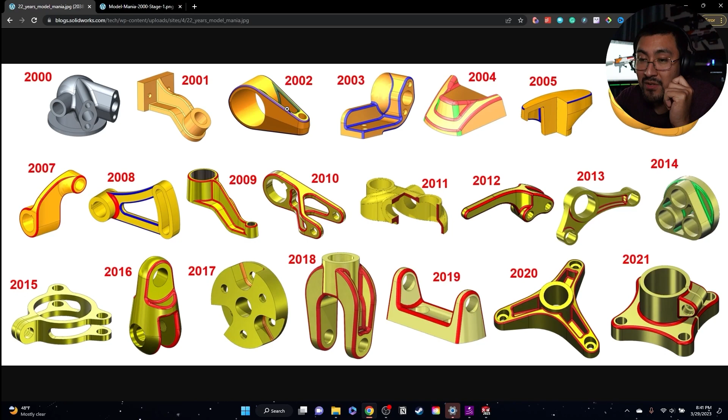Let's do this. Let's look at this part here. This is one I've been looking forward to, funny enough, because it has draft in it. This draft always throws me for a loop, especially since my specialty is actually plastic design. They have draft in both directions, and there's this cut in it. I'm wondering if this cut is going to be a shell or a rib feature. I don't know, so let's check it out.

Scroll down here, and it's two phases. So the first phase of the drawing - oh, this was in color. Let's look at this part. There's actually draft in it too, which immediately gives me a couple ideas. And it does look like it's symmetrical up and down, which makes it much easier.

What's this? Section BB. I'm looking for that BB symbol here. There's that A, BB. Oh, so basically it's just this wall, showing you the draft, which is 7 degrees. Let me see here, 7mm wall thickness, 15 degrees. More draft here, 7. So the general draft is going to be about 7 degrees, which is okay - it's a good amount, a substantial amount. It will definitely come out of the tool.

And then the center here, there's no radius. So okay, I'm going to do this color coding as well - I actually really like this color coding. 3mm fillets for the green. Is the purple different? Edges of part and inside of the pocket is shown. So they don't have it as two different radiuses - that would have been cool. Fillets removed for clarity - that's pretty cool.

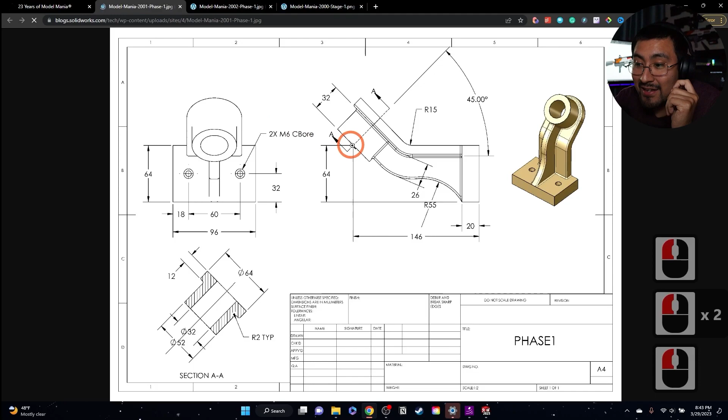Okay, so unlike the other parts, this one actually looked pretty good, but for the... it's just like, oh wow. And now the 2002 version comes out, it looks really different. Oh actually, let me first check, because I always kind of forget.

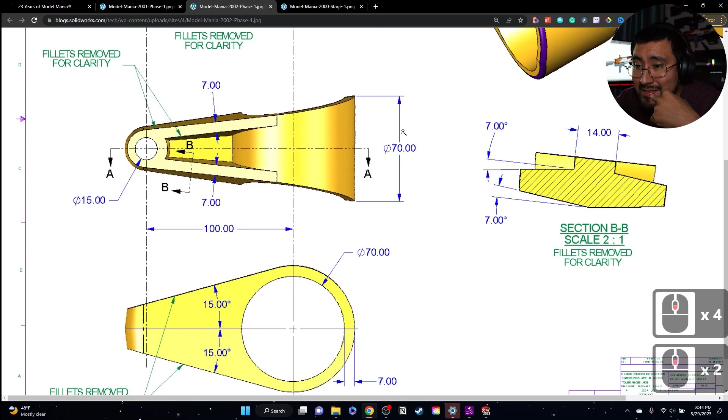Go down here, and this part is going to be in inches. Oh, so there's actually a pretty big part - that's insane. Interesting, I don't know what this diameter means here. I mean, it's both sides, so I'm going to use a full. I'm actually not going to focus on any one view - I'm going to focus on all 3 of them at once.

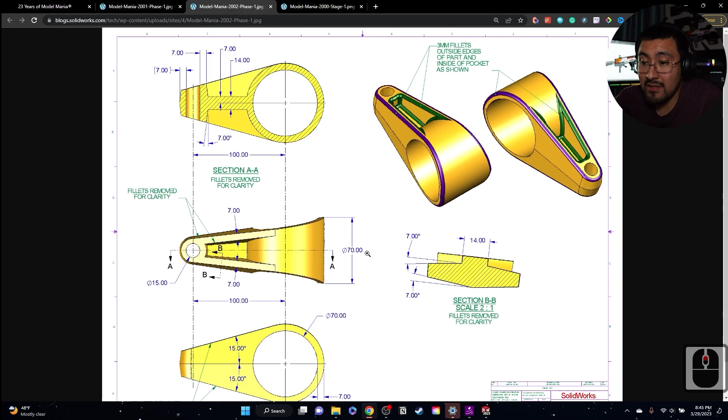So the way I'm going to start this is I'm probably going to make this shape on the right plane, make this my center, and just extrude this 70 inches - apparently 70 inches. So let's start that in SolidWorks.

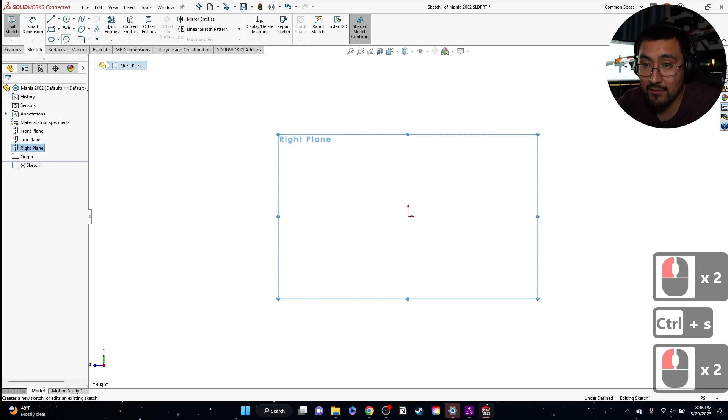So let's go to File, New. Let's press OK. Let's save this - I'm going to name this one Mania 2002. And remember, all these files are going to be available for you guys to download. Anything else - make sure this is in inches. Perfect, save that. Make sure to right click on the right plane, and then let's start this.

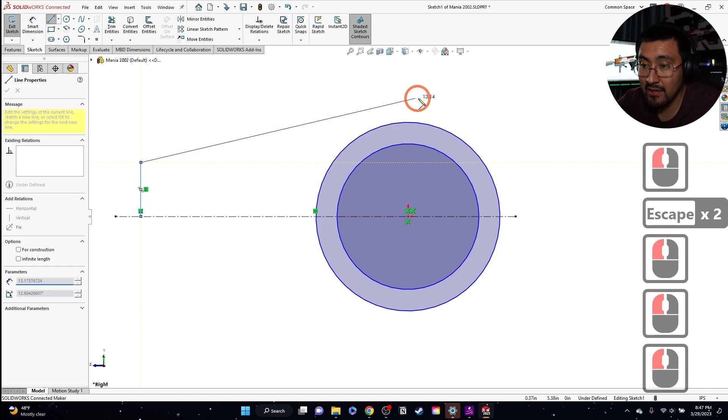So I'm going to start here. I'm going to do the basic shape, and then I'll give it dimensions later on. Actually, let's do this - I'm actually going to build this in half. So I'm going to go like this, and make a straight tower. The reason I'm making it straight, and you guys will see later on, is that I'll be able to draft all the walls at once, and I won't have to worry about that so much.

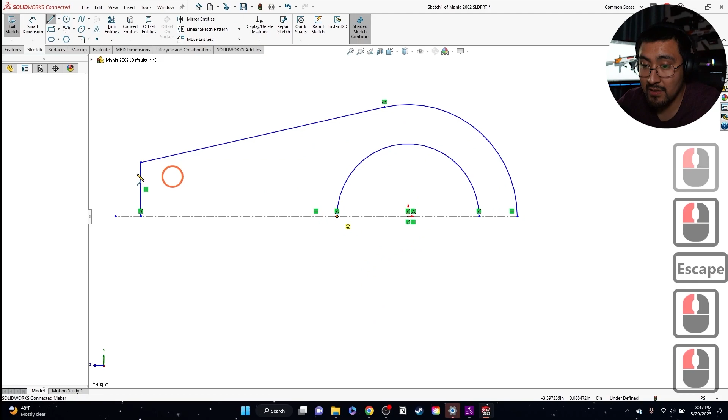Oops, let me make sure this is actually touching here. Trim, trim, trim. Make sure here to here is connected, and here to here is connected.

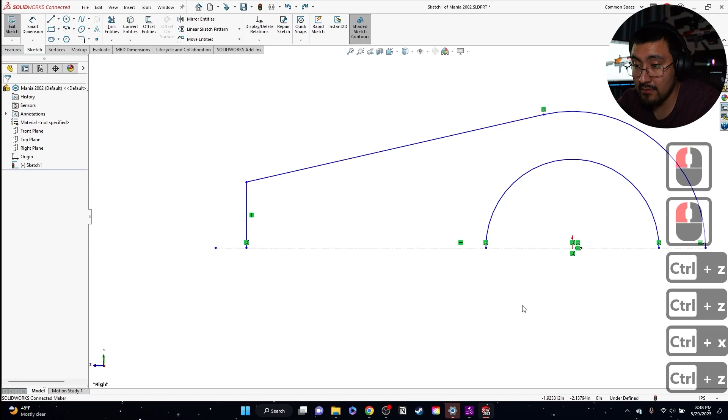And let's check out the dimensions. Oh, actually there's going to be like a center line here giving the diameter of the hole that's cut in here, so I'm going to use that as a reference. I'm going to Control Z it, and I'm going to keep it like that for now in case they change that on us, which I doubt, but you know, better safe than sorry.

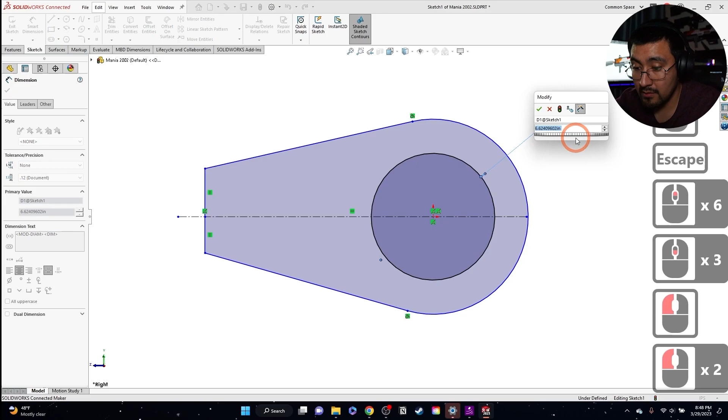So 70 here, and from here to here it's gonna be 7 inches, and there's gonna be a center line here. I'm just going to use that as a reference for now. And this edge to this edge is going to be 100.

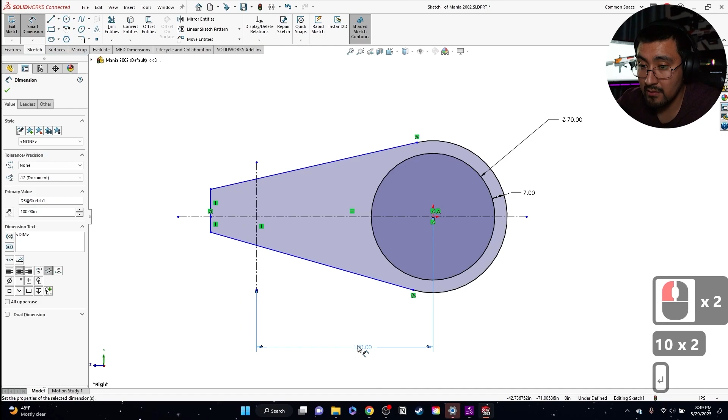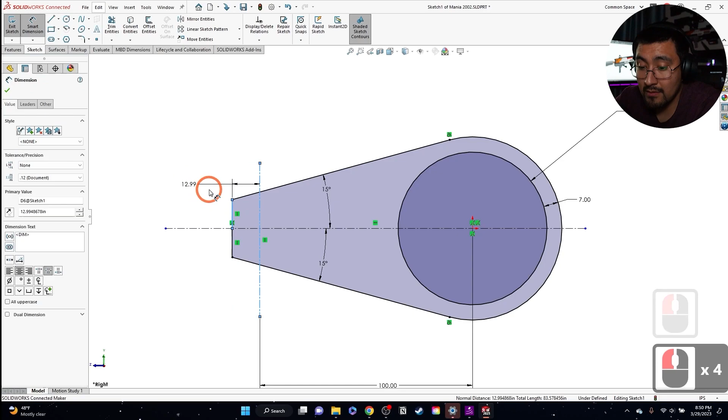And then this to here is 15. This to here is 15. And now, so here to here is going to be 12.99. That's a reference dimension, by the way, so we're taking quite a risk there.

And we're going to extrude that mid-plane 70 inches. Boom. Save that.

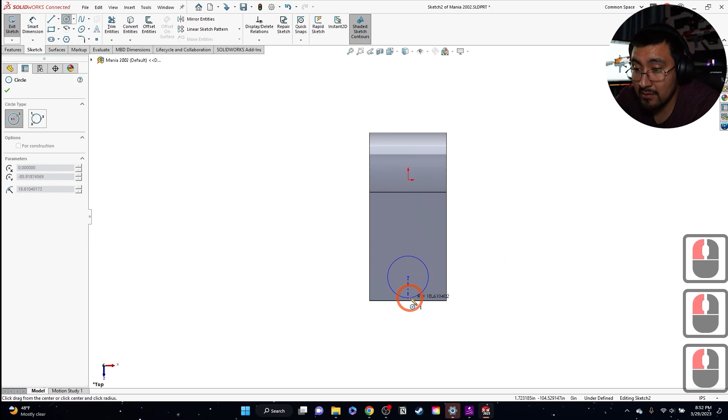Now we're going to go top plane. So I'm going to go here. And then in our sketch, we actually made that reference. So here we're going to actually do a pierce. There we go. Make this tangent to this face. There we go. And now I can actually hide that sketch for now.

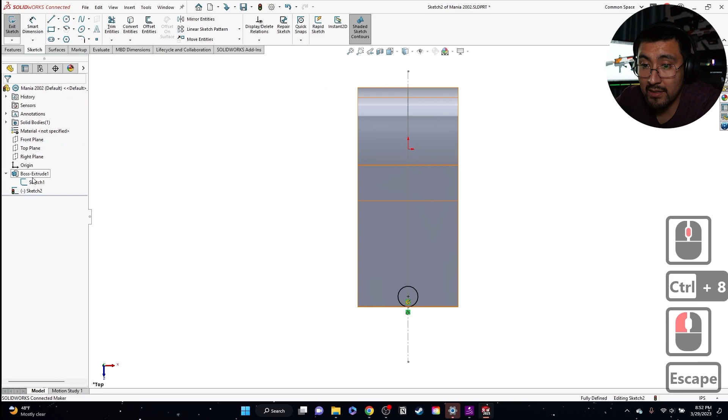Here, to there, to here. Not that. Something tells me I'm doing something wrong. We'll soon find out if that's it.

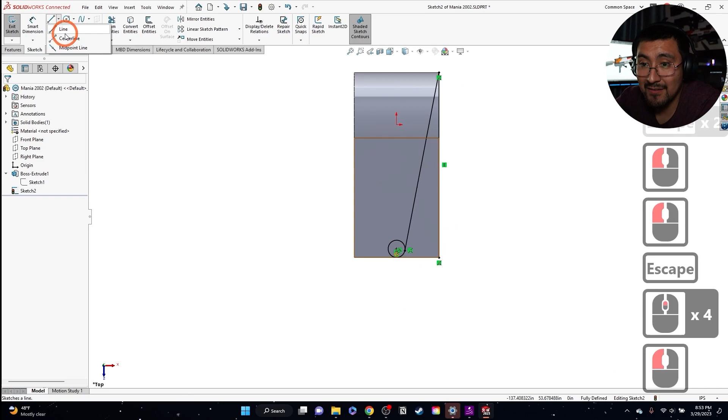Mirror this. I love mirror, by the way. It's my favorite thing to do. Basically means you gotta have less work to do.

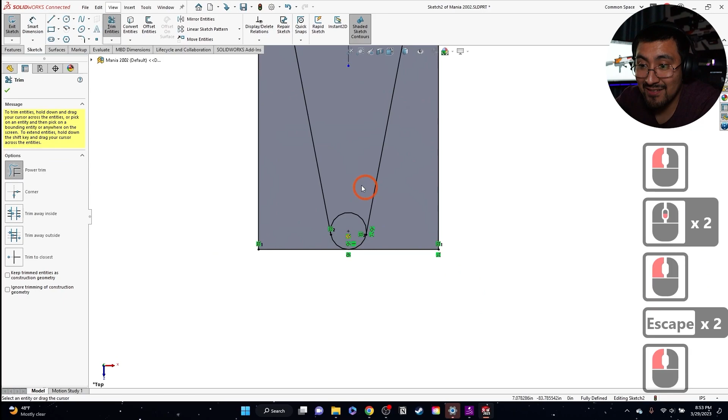And then we're gonna get both regions. We're gonna do through all both. Press OK. Now we got that.

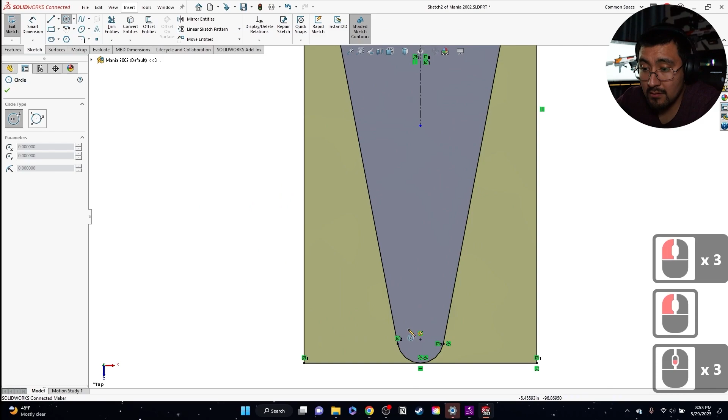Sure. Same time I could do that cut as well. What's the dimension for that cut?

15. Something looks off here. Actually, wait, this is the wall thickness from 15. I actually have that wrong. So this is actually 15 and the 7.

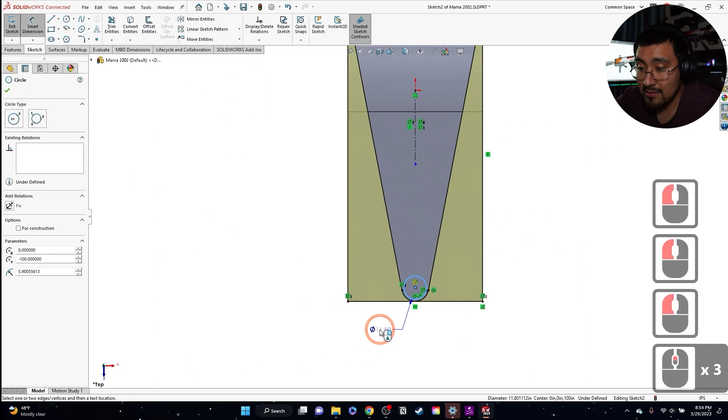So okay, there's one mistake. So let me go back. So here it's not 7.

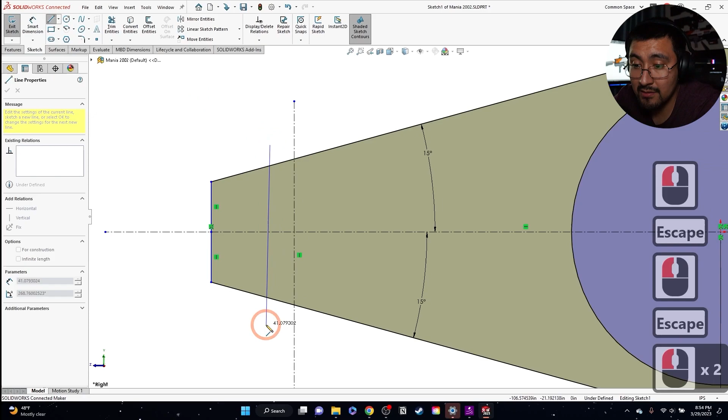So we're actually gonna make two references. We'll make this line here. And it probably would have been better to do another sketch, but since I'm at this point, do 15 there. The reason why I made it a solid line is because you can't do a dimension like this on a construction line, and now I could change it to a construction line.

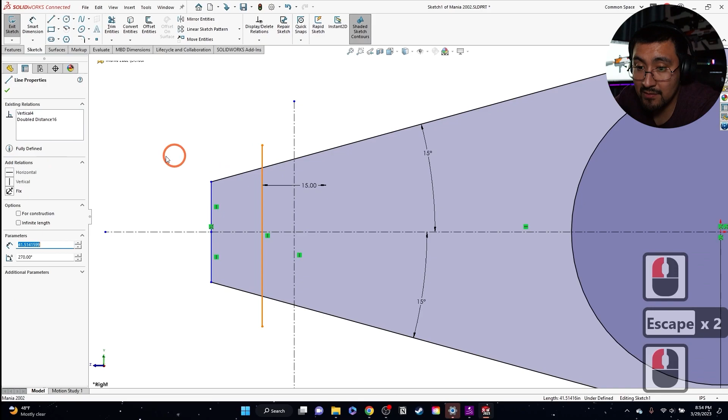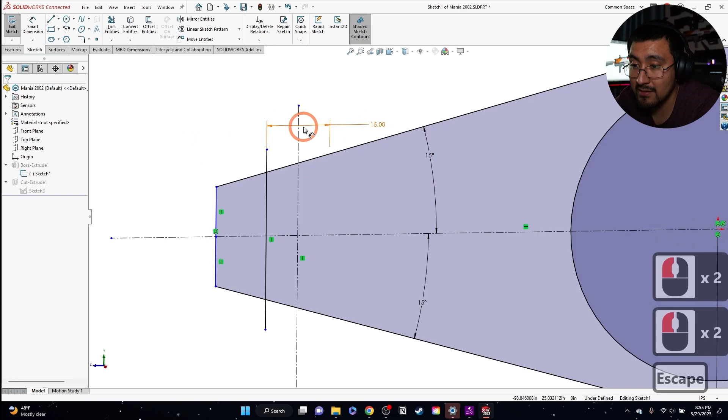There'll be no issue. I changed it back, so I want to keep it as a solid line. Yeah, so I could keep that 15 in case we want to change it in future. So I'm gonna do the 15. I'm gonna keep it as a solid line. I thought it would keep it as a regular line.

Oops, almost forgot one more dimension, which is gonna be the 7 from the edge. And then let's press OK. Exit and let the sketch rebuild. I know it's gonna break.

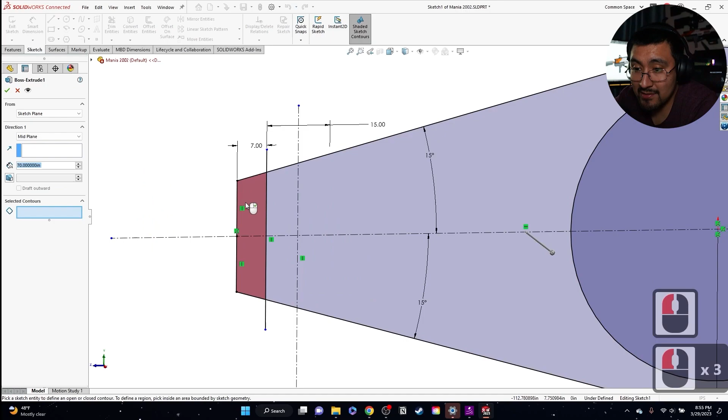And we're gonna pick the regions instead. Region. And now we'll go back to this. And this is gonna be really messed up.

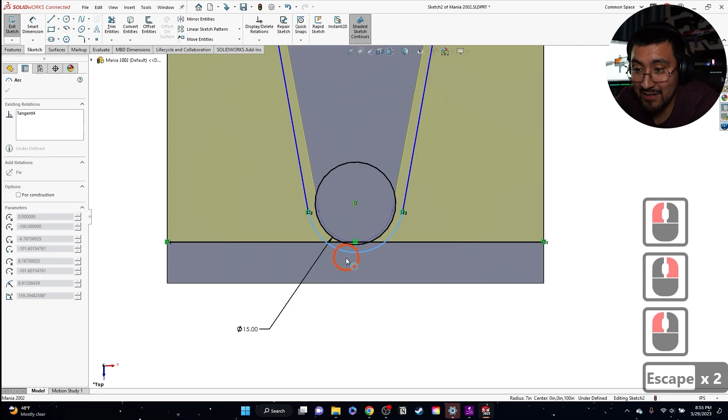So this tangent right here, which is not really tangent anymore, it's gonna be tangent all the way to the outside. Here we go, tangent. And then...

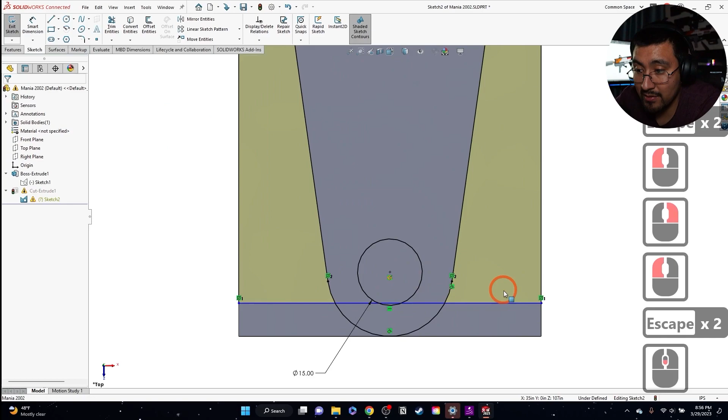Things wrong here with this line. Why is this line up here? This coincidence is broken. Let me fix that here.

And let me redo all of the regions. There we go.

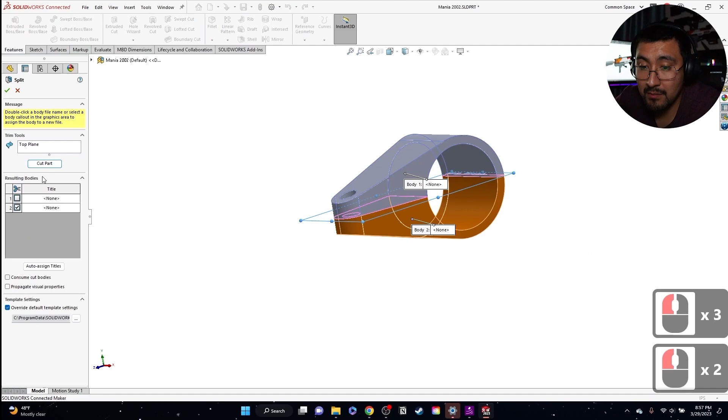Okay, I'm gonna do one thing here. We'll go insert, features, split, cut part. I'm gonna cut the part and I'm not gonna consume it. It's gonna leave these two parts. I'm gonna hide one for now.

And then what I'm gonna do is go back to the sketch, which we're now gonna classify as master sketch. And I'm actually gonna do another center line. This center line here is gonna indicate, and I wish I did this on the opposite side as well, which I could probably do with this mirror about. There we go.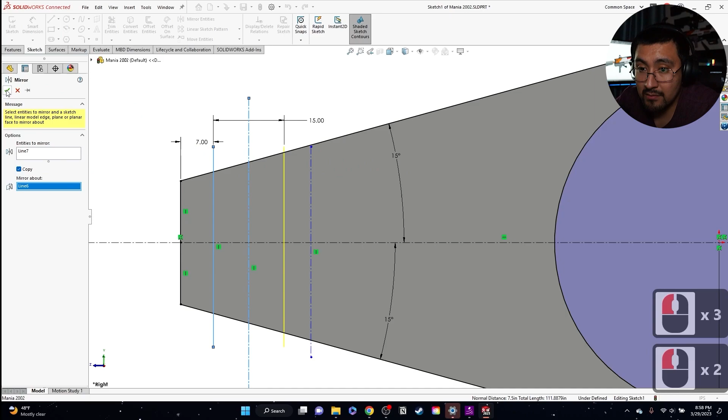I'm gonna indicate with this. I'm gonna give this a dimension of 7 now, which is gonna make it that wall. I'll make sure it contacts this point here. And it's gonna break it again.

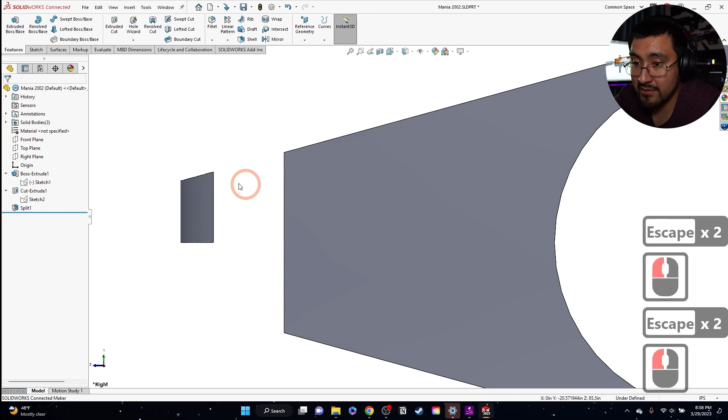So we're gonna include this region. And this extrude cut, I don't know why I gave it the 15. I'm gonna remove that and then just make it pierce the line in that sketch, so that sketch could be our master sketch for almost everything.

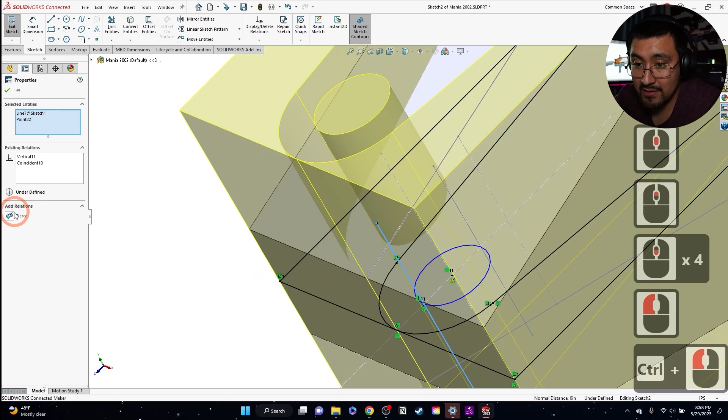So we're gonna get this, we're gonna touch that, we're gonna pierce it. And now it gives it a relation. So what I'm actually gonna do, I'm not sure if this is the right way, honestly.

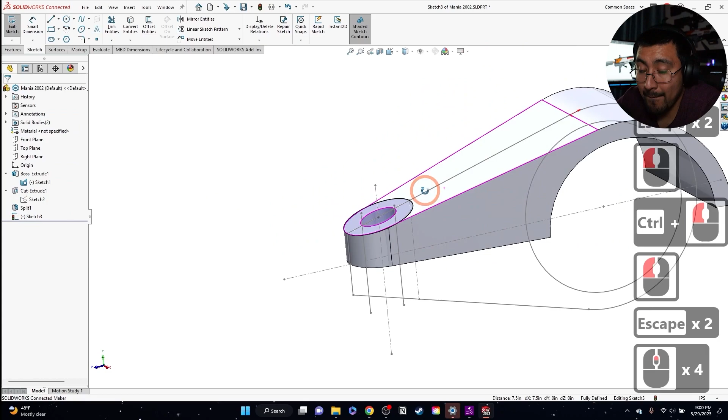I'm gonna get there. Make sure this is concentric. I get this line here. Get this line here. I'm gonna offset 7.

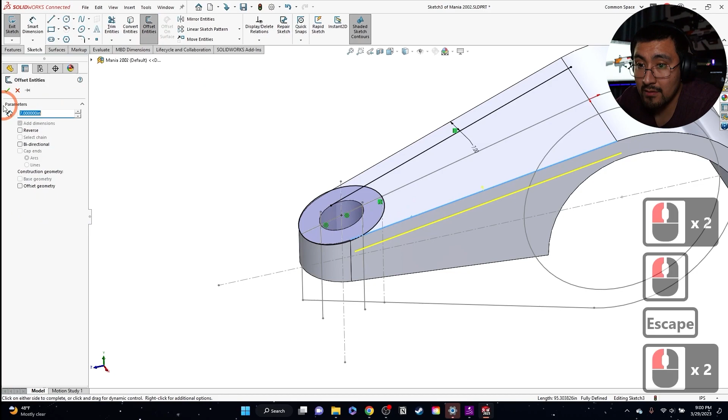Oops, I guess I can only do one at a time. Offset 7. Offset 7. Actually, before I complete this, I'm gonna scroll back on this.

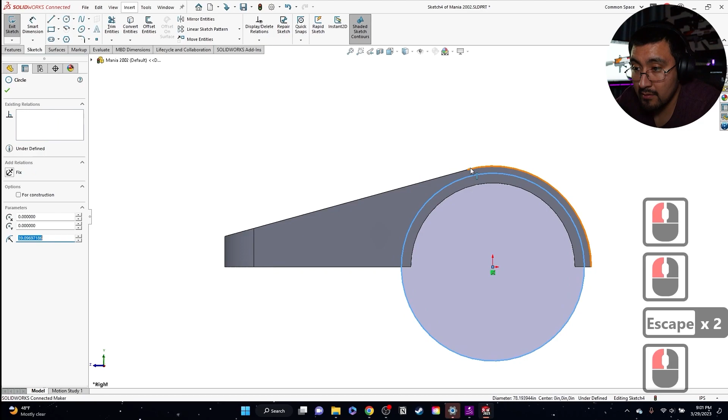I'm gonna hide this. And then what I'm gonna do is I'm gonna actually make that equal.

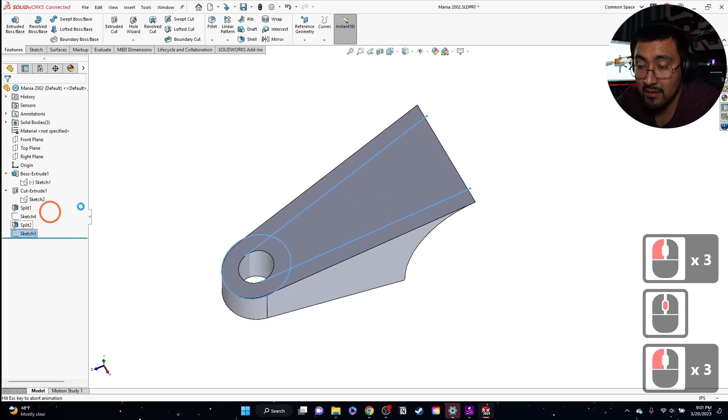Insert, features, split, cut. I'm gonna cut that out. Well, I'm not gonna cut it out. I'm just gonna split apart, hide that, go back to my sketch, go to this sketch, convert entities, and then trim. Okay, trim.

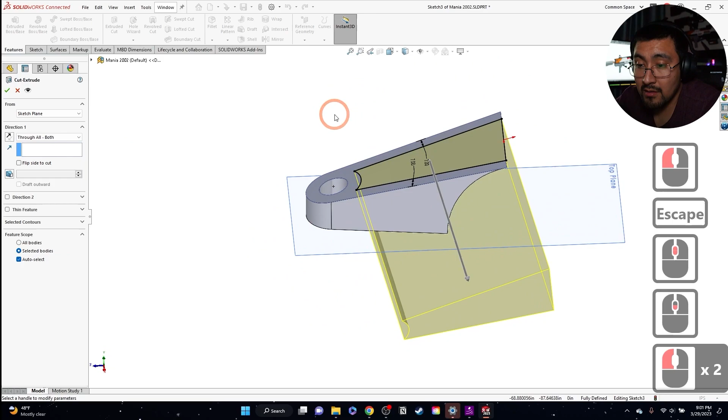Okay, cool. What I'm going to do is make this visible, which is the top plane. Extrude cut, I'm going to pick a direction, this direction. I'm going to go offset from surface, offset from 7, and press OK.

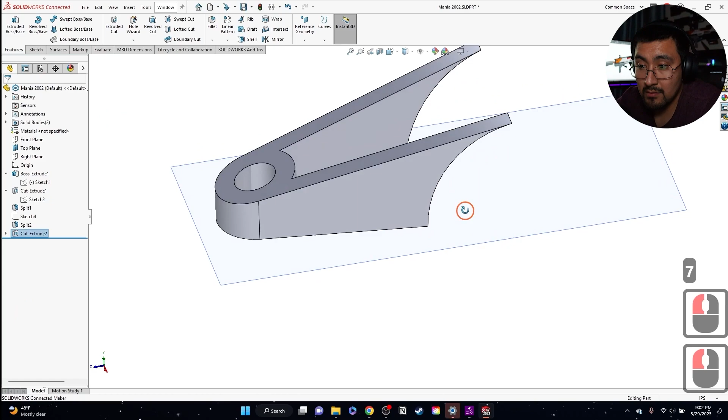Oops, forgot one thing, our 7-degree draft. I'm going to do the honest thing and consider the opposite side a completely different side. So I'm going to get that sketch I use, and split this apart. Split.

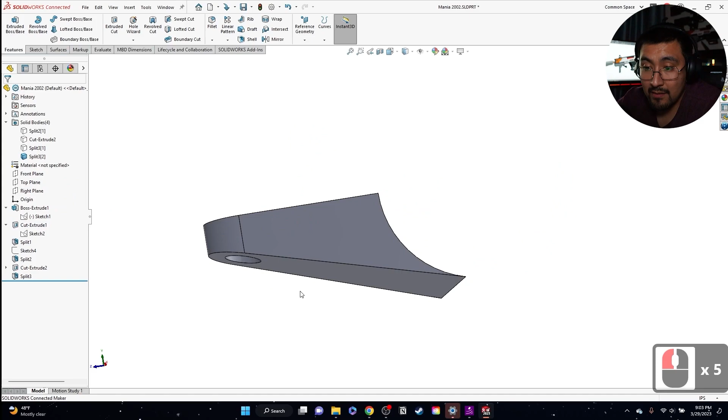Hide that, hide that. Go to the same sketch. Make my master sketch visible again. Make sure this is concentric. And then touch that. There we go.

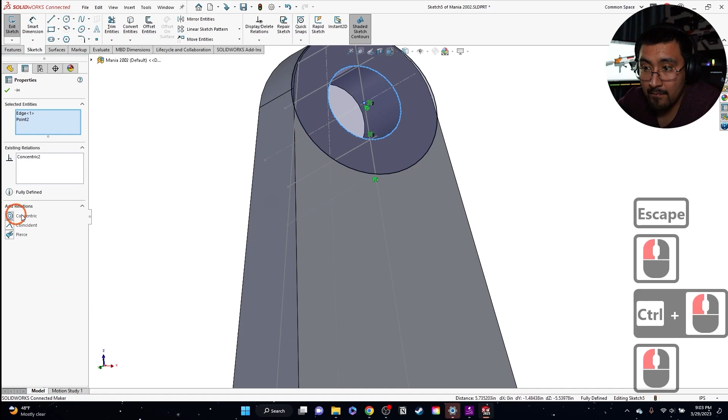Make this concentric, and then do the same exact thing. Offset 7. Offset 7, reverse this one. Get this line, convert entities.

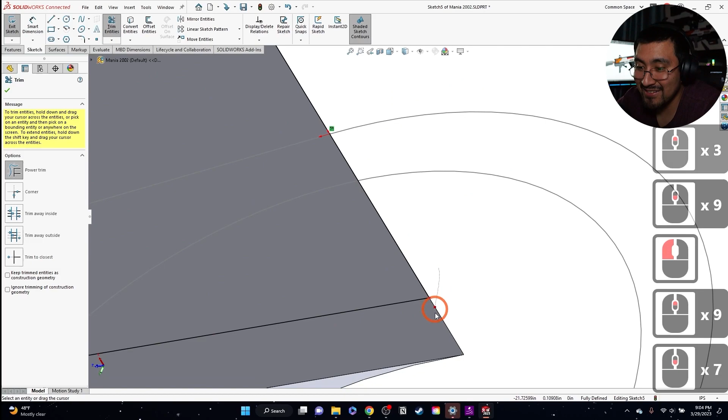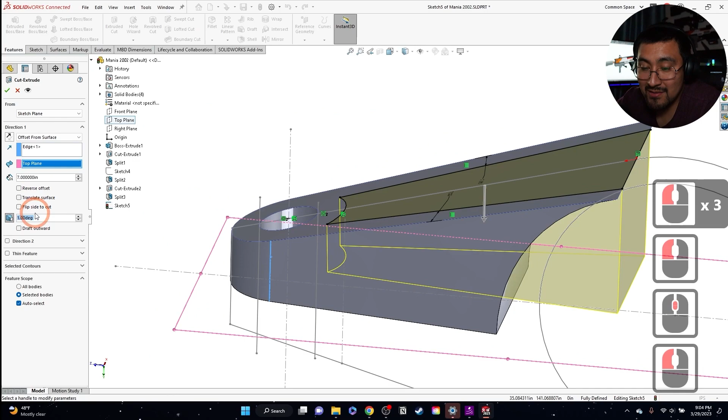Let me just pick the line. Let me pick the surface, which would be the top plane again. The draft, 7 degrees. Then let's hide this. There we go. Save.

Show that, show that, show that. Oh, let's combine all the bodies first. Combine. Oh, not all the bodies, just the top and bottom. This one, this one. Okay.

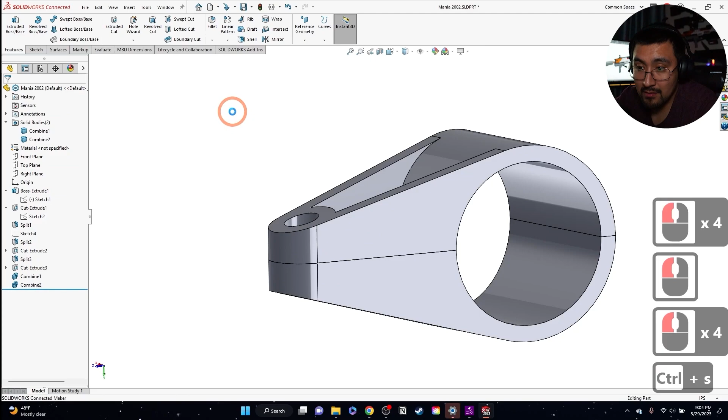What I'm going to do here is another draft. From here, 7 degrees. Right click, select tangency. Make sure this is pointing up. And then apply.

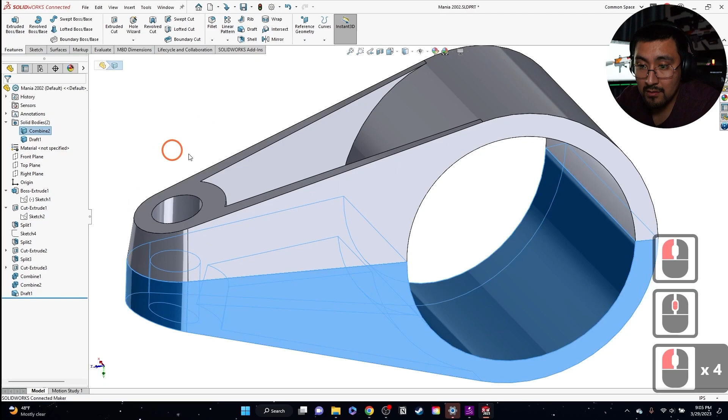Do the same thing to the bottom face. Draft, select the faces, select tangency. Make sure it's in the right direction. This is the direction to pull. And then draft.

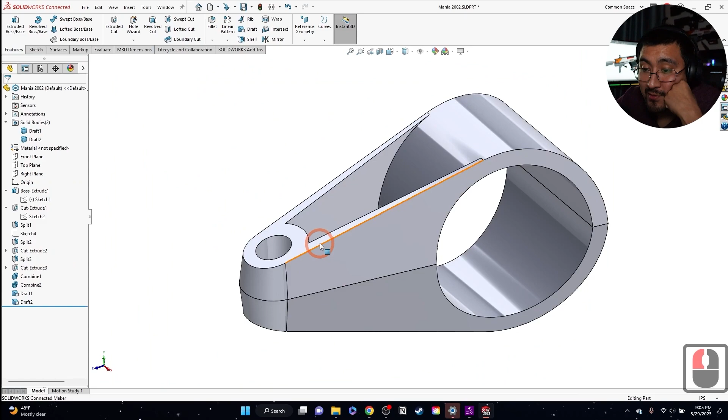And I think I made a mistake though. So this draft here that I just did should have been at a different level. So okay then, what I'm going to do here is do something that might break the tree. I'm going to pull this up. So first I'm going to see how clear it is.

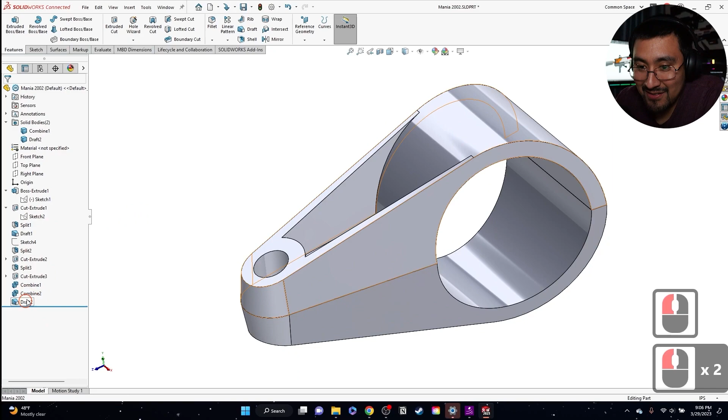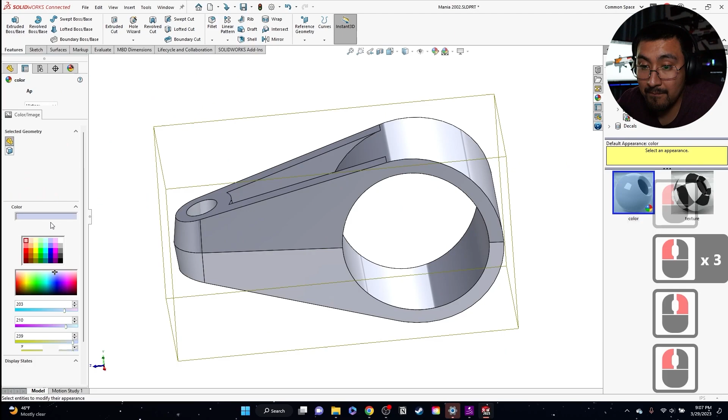So let's add a color to this, make it all pretty. Edit, it's that yellow color. There we go. And then the radiuses are 3mm fillets. That's funny, that's 3mm, and then it's 3 inches here.

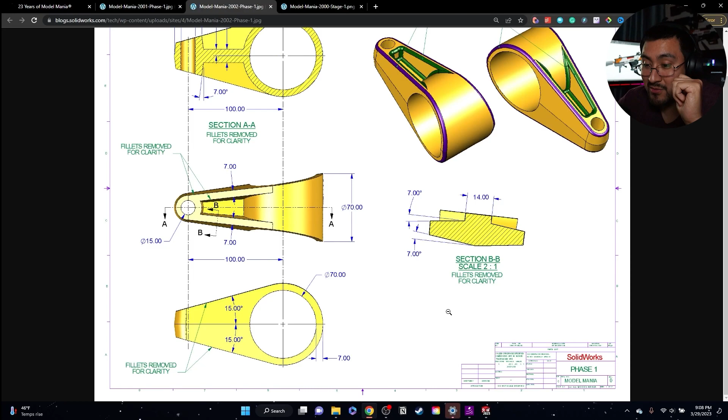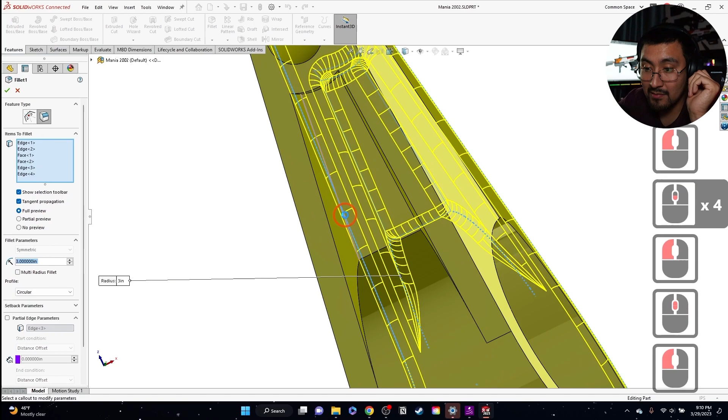So I'm just going to do the first one in here, which is going to be these radiuses in here. I'm going to separate these. I'm going to do the same thing on the opposite side. Oops, I think I clicked something wrong. Yes I did, I want faces.

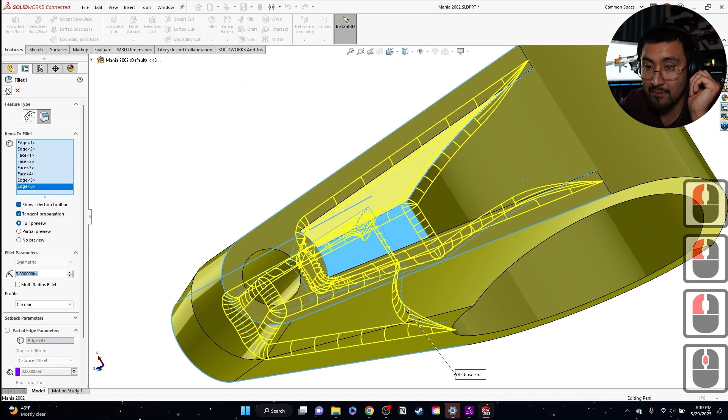This face, and just these 2 inner edges. Oops, not yet, not yet. Okay, press OK. Press OK.

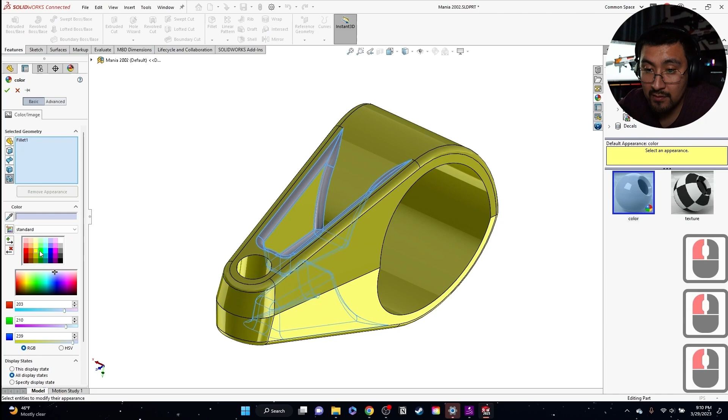And then the inside color was green. The outside was purple, the inside was very cool. So change this fillet, the green. Change the other fillet to purple. Cool, and there it is.

It's in inches, I feel bad honestly. I'll probably remodel this up in millimeters as well. Dimensions are in inches, yeah, dimensions are in inches.

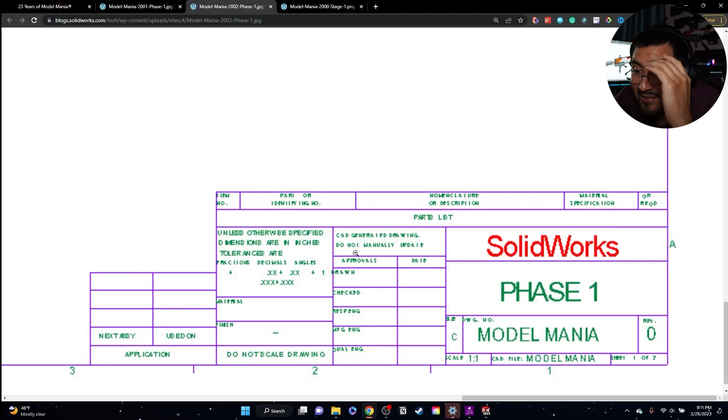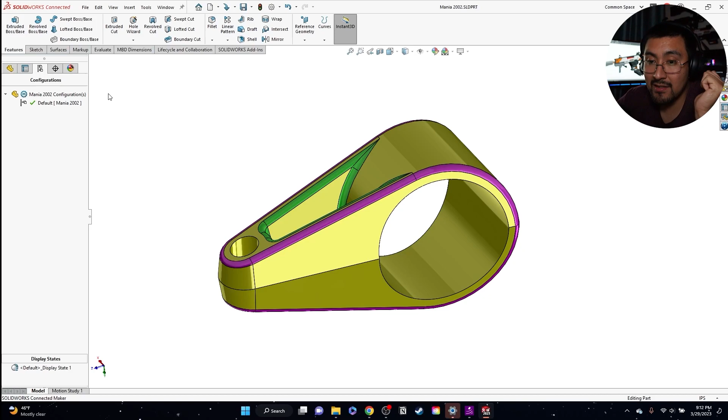It says it there. They actually do a couple configurations, and they do numbers, so they have the default B, C, and D. So this is a good thing because I get to show you guys how to do an Excel driven configurations list. You need Excel installed on your computer to be able to do this. If you don't have it, you're going to have to build every one of these configurations out, and I don't think Excel is hard to get nowadays. So let's do the Excel sheet, and if you guys want it the other way, put it in the comments and I'll do it the other way as well.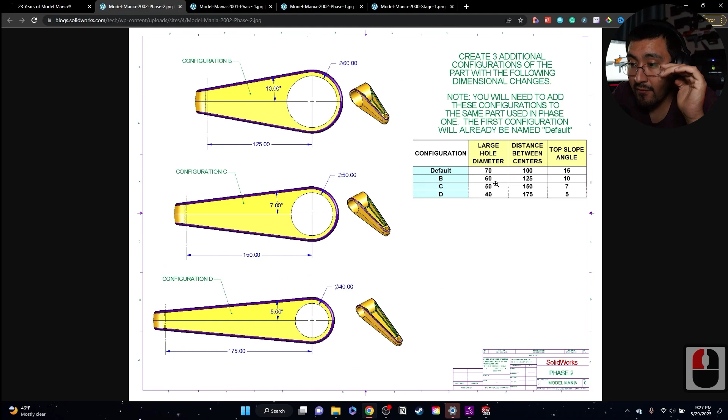Okay guys, so now we're going to do the configurations of this. It's going to be several configurations: this large hole diameter is going to change into 4 different versions, the distance between center holes, which is this one right here, is going to change into another 4 versions, and the top slope angle is going to change.

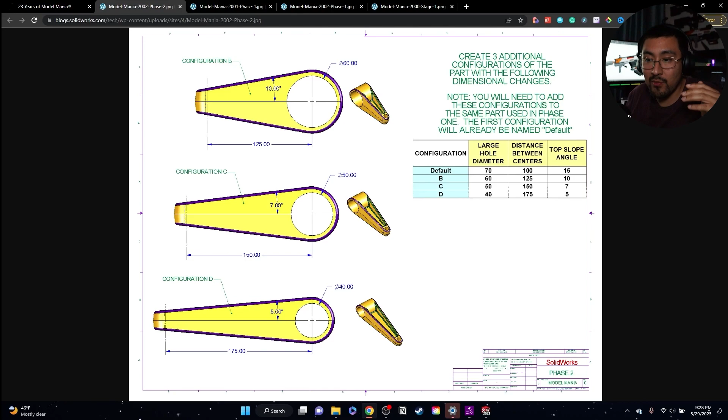And this is a great example to show you guys configurations being created from an Excel sheet. This is super exciting. I love doing this because this is the part that wows people when they see it. It's like, oh my gosh, you have so many levels of design, and you created your model in such a smart way that you're able to change it without breaking the tree. Let me show you guys how to exactly do that.

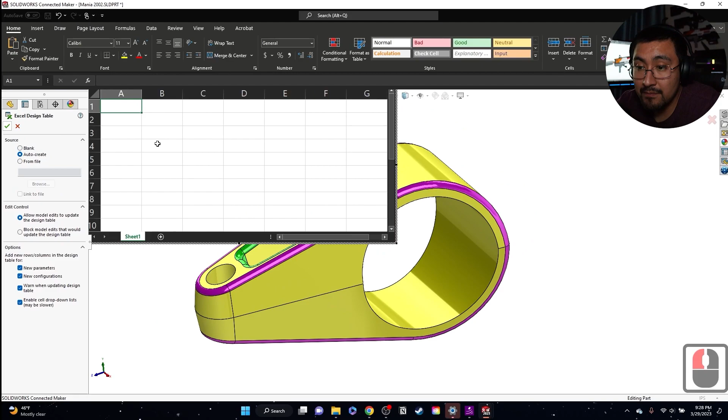I'm going to save this first. Insert tables, Excel design table, auto create. We're going to leave everything mostly as default. Press OK, and then select all of these through. Shift to select all of them. Okay, and now we have all the parameters in this.

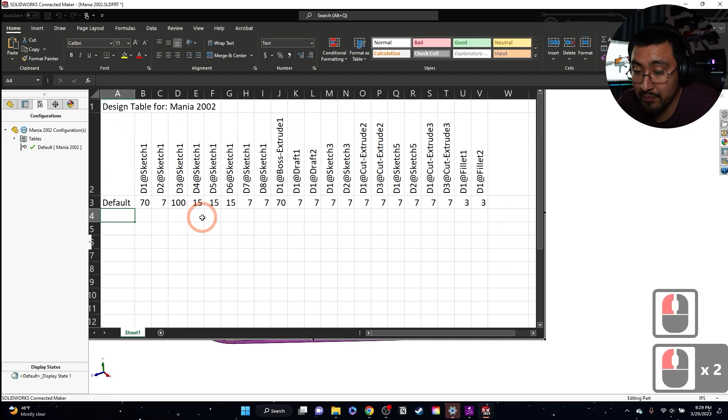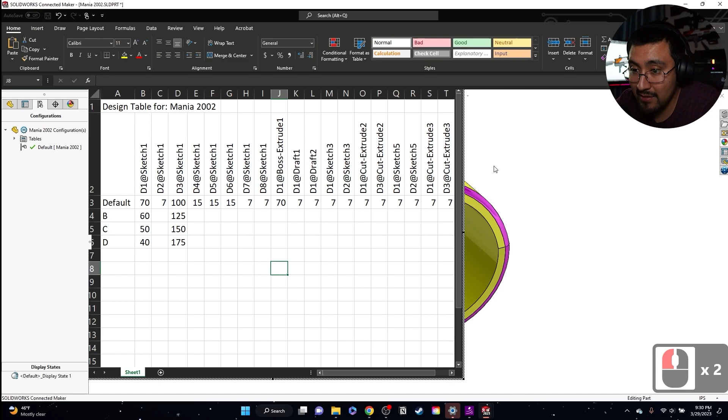So what we're going to do is we're going to call this one B, C, and then D. And then 2 of these are angles, and I'm not too sure which ones they are. I got to eliminate one of these. So let's get out of here first.

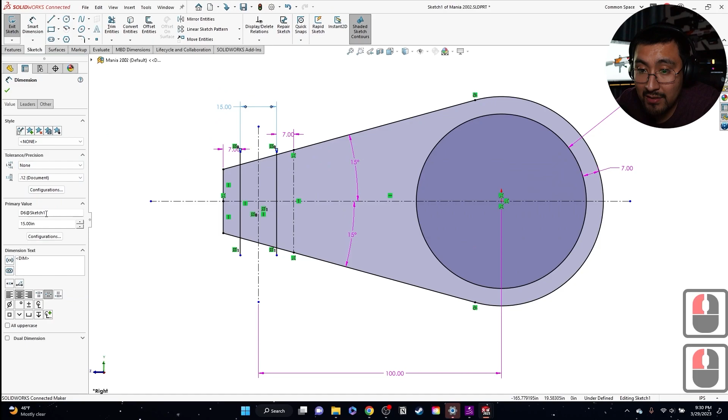It's going to generate your 3 configurations. And then I'm going to go to that sketch. Edit sketch, fit. There's 3 15s in here. This 15 is going to be D6, dimension 6 sketch 1. So that's the one that we're not going to change.

So go back to the table, under tables, edit table, and maybe bring in a couple of extra things. Color, this is fine. And then that D6 is not the one we're going to change, so we're going to change these 2. I'm going to copy these 3 cells over, and then let it auto build.

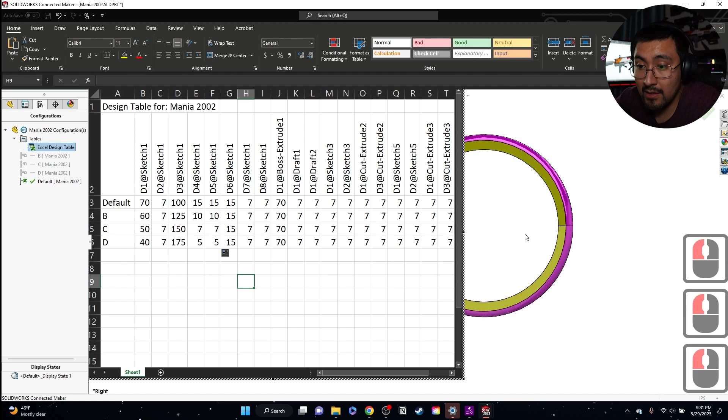I guess I could have made it symmetric, but that's fine. The way we did it, in case it's ever changed—I mean if it did change that would have been a crazy one, but no, it is symmetric. And then you could just go through all your designs. You can see the differences in every one of them. Gets longer and longer apparently. That's pretty cool.

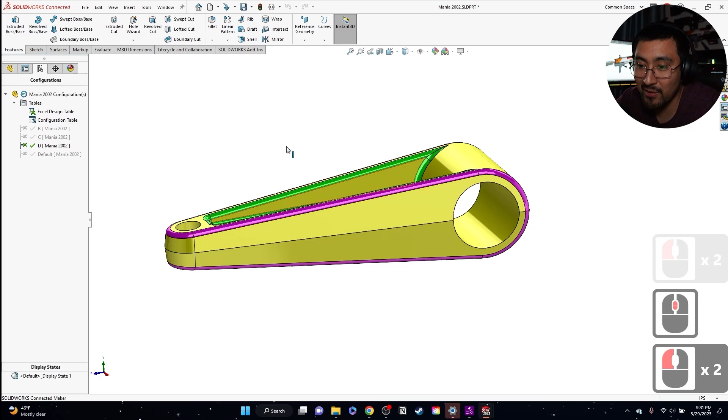So yeah, that's the design table in SolidWorks with an Excel sheet. Caveat to that is that you do need Excel to be installed on the same system as SolidWorks, just to use it.

If you guys want to see it the other way, without Excel being installed on your system, let me know in the comments below. It's basically like the other parts—you're just creating them one by one. With the Excel sheet, you can make it so much faster and create way more different variations, and even use the power of Excel with equations to make some crazy setups and really go ham on this.

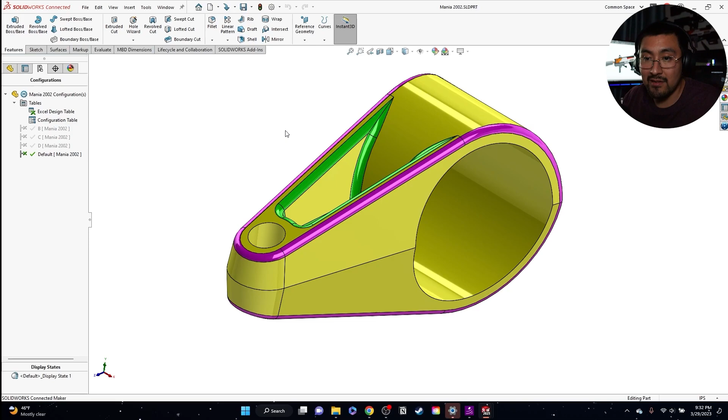So here's this part. Before I end this off, let's go to evaluate mass properties. Let's go to the default one. I'm only going to do the default one for this time.

You guys remember, you'll have full access to this model. You can go pick up the model, links in the description. You can compare it against your own model, and then let me know if I made a mistake. I'm going to check this against the solutions video, and if there's a change I need to make, I'll add it on to the end of this video, let you guys know exactly what I made a mistake in, show you how to fix it inside the model, and update the model as well.